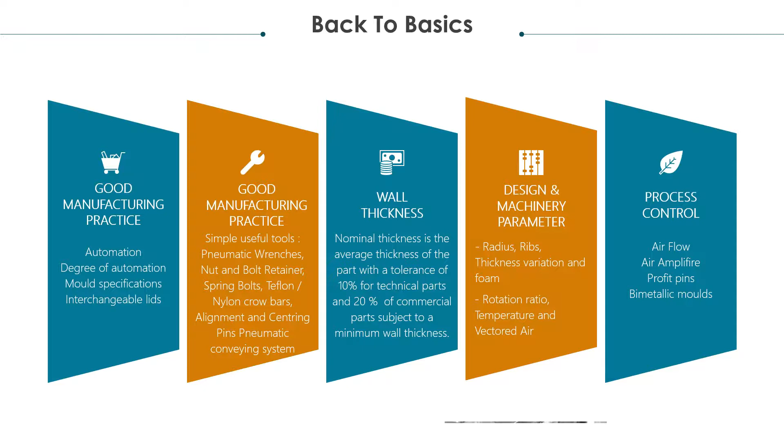Simple thing to look at is clamps on your molds. How many people still run with nuts and bolts and rattle guns, which make tremendous noises and throw out a lot of air? Sometimes they're dangerous to the workers' eyes. Can we not replace these nuts and bolts with clamps? Or to start with, the worker tells you, sir, the flange leaks and the flange is bent. So why not put partly nuts and bolts and partly clamps?

These are some different types of clamps. If you want to go to the next level of automation, you can always look at something like this, which Oliver has already shown us in his earlier video, ROMA. Now this is really a high-tech spider with some pneumatic clamps which work at a very high temperature. So this is going into very full high automation level.

So it's interesting where you can start and where you can enter, if you have the money, the output that is required for the number of molds that are going on. Spider hands work in seconds. Ordinary clamps will give you maybe a minute, but at least you're getting towards that level of output.

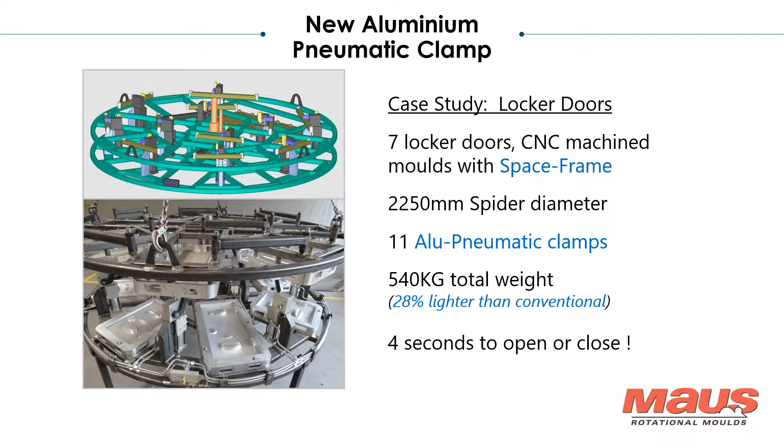Powder loading systems. Everybody's question today or problem is, why do I still need to load manually? Why do I still need the man to go up there and throw the powder into the mold, especially for people who make multi-layer products? Single, double, triple. I just got an inquiry for a machine for 6 layers. I really don't know why he wants 6 layers, but as a machine builder, it's our job to provide whatever they want. So if they want 6, 8, 10, we give it. But I think it's really crazy to do this.

People in the European world and the North American world, including Africa, have never heard of foam tanks. In the Middle East and in India, foam tanks are like every second factory or almost every factory would be producing a foam layer tank. So it depends region-wise what is the demand.

Powder loading systems, there are plenty of people now in the market, but most of them have specialized in conveying of powder in the PVC industry. In the rotomolding industry, there are very, very few people who are specialized. One of the top guys, I think, in loading is a company called Roto Loader in Canada. He has dedicated his entire powder loading system just for rotational molding. So that is somebody exceptional.

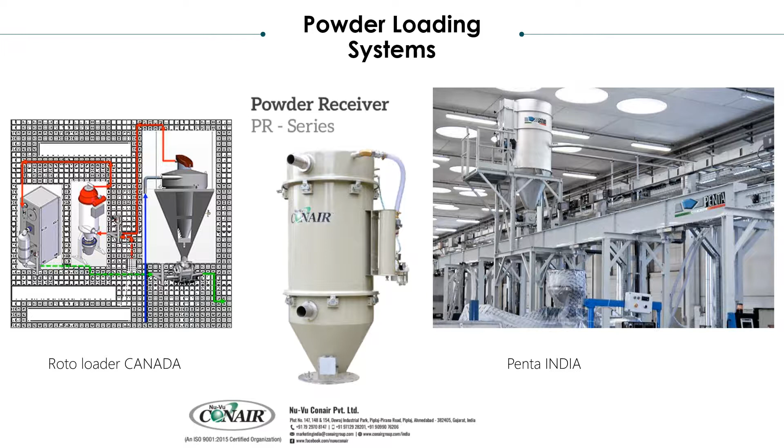Somebody should really try this out because it's not that expensive. We helped somebody on powder loading systems, and they wanted to put in very fancy silos made from stainless steel, which cost almost half the price of a machine. So we said, but you are a rotomolder, you can easily rotomold your own silos and connect them up. And that's how it was done, saving him a lot of money.

The other thing I see when I go into many factories is people trimming mostly with hand shavers, or with a hacksaw blade that's been sharpened, or even with old scissors. It's surprising, because today a simple tool like a router is available so easily, which can trim a 2-meter part in maybe just a few seconds.

So you can see how quickly it is. Routers are available off the shelf. They are quite safe to use, but they are very, very fast, so with just a little bit of guarding, you can easily do a lot of work with it.

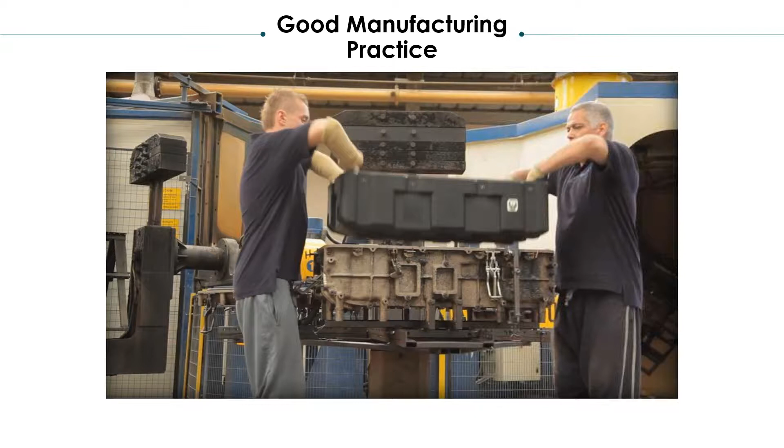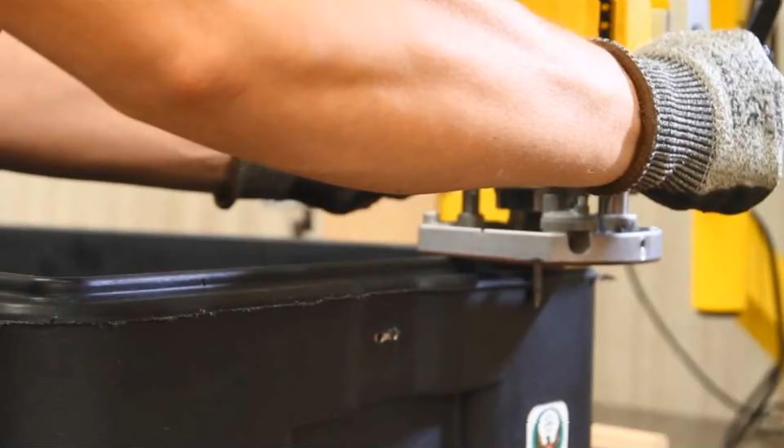Is the volume too loud? Can you guys hear me? No, there is no volume in this. There's no volume coming through? Is there no music coming through? No.

Okay, then let's just look at a silent movie.

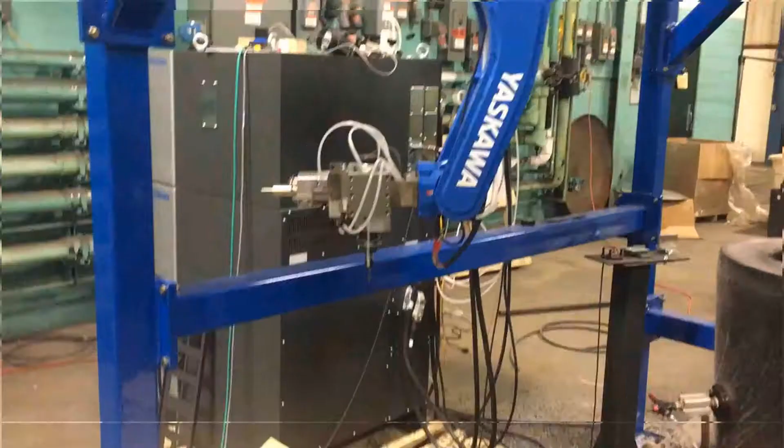If you go to the next level of routing, probably another step towards automation, you use a small little robot. This is a Kawasaki, Yaskawa. You can buy a Kawasaki, you can buy a Fanuc, you can buy a Kuka.

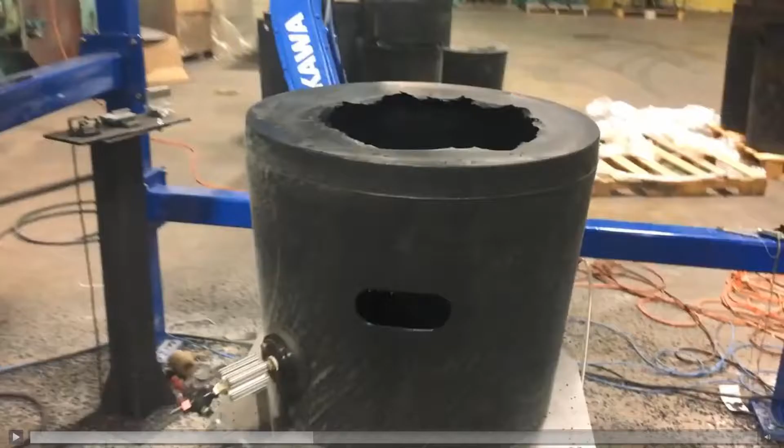The advantages of these routers are they are programmed properly. They do the same job again and again, and you don't have to depend so much on the worker, whether he trimmed a little less or a little more.

Can you guys hear me at all, or is even my voice not coming through? We can hear your voice, but there is no volume in the video. Oh, all right, fine, that's okay. You'll have to make do with me without the music.

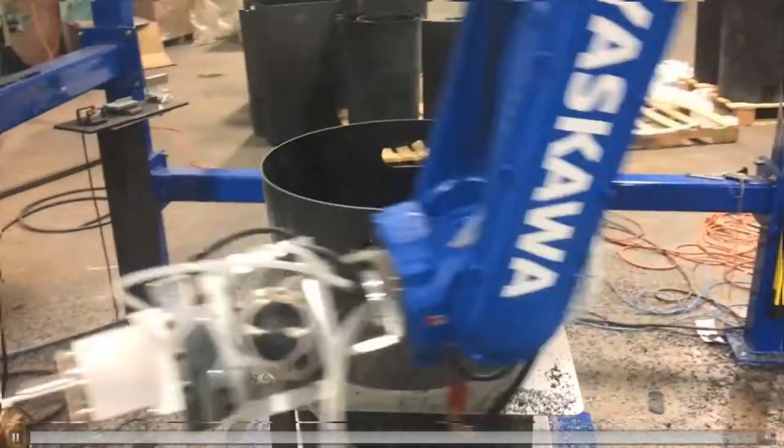No problem. So you can see how quickly this little robot, which is mounted from the top, not from the bottom, can do an excellent trimming job. You can buy today plenty of second-hand robots in the market. They're reconditioned and available very cheap, because a lot of automotive industries have shut down or changed their technology and got improved versions of robots.

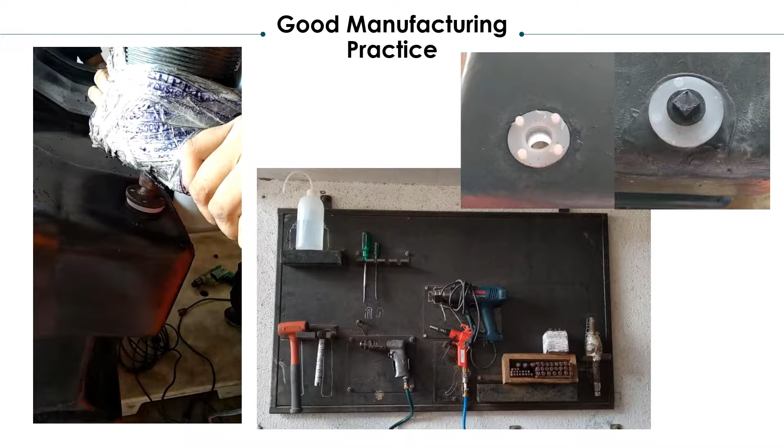If you look at this little video here, this is a spin welding process. Here there are spin welding fittings on top. One sec. These are spin welded fittings and the finish of that, and here you will see how the spin welding process is done.

This is again using a router. In a matter of a few seconds, you can put in female, male, any kind of fitting, which is bonded at high temperatures using friction. So basically what you need is a correct polymer fitting and a good routing gun, operating at maybe around 20,000 RPM minimum. As soon as it's molten, you just push a little bit and boom, it's done. The job is over. It takes about 5-6 seconds to do one fitting with this.

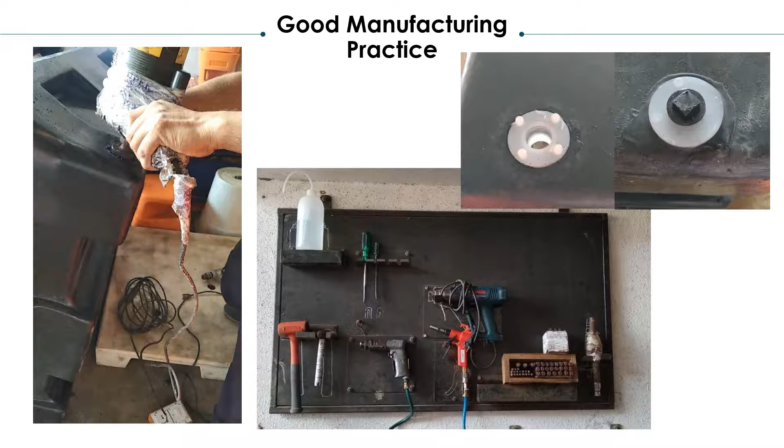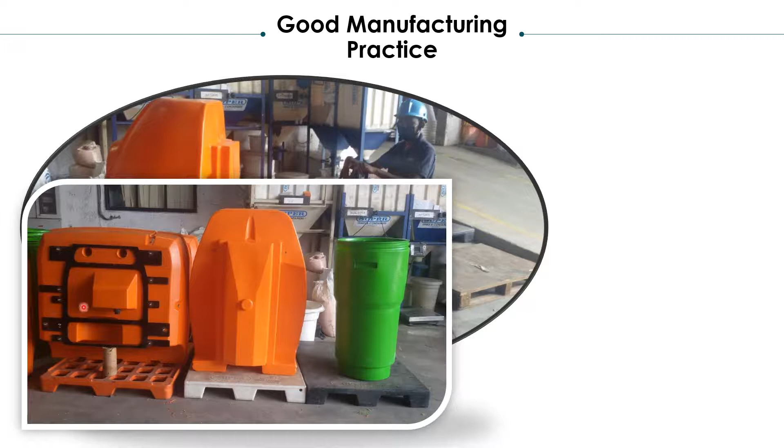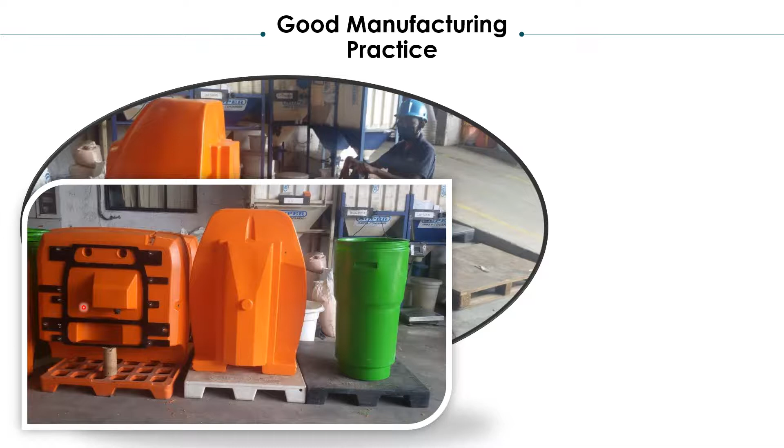Here are some examples, any pallet, second-hand, used, anything—even a fairly cleaned wooden pallet can be used to put the product on. Here you find this company putting a steel frame at the base of the part immediately as it comes out, while it cools for the next 6, 8, 10, sometimes even 12 hours, so that there's no deformation and the mounting subsequently on the vehicle is perfect. So just a small tip for someone to know.

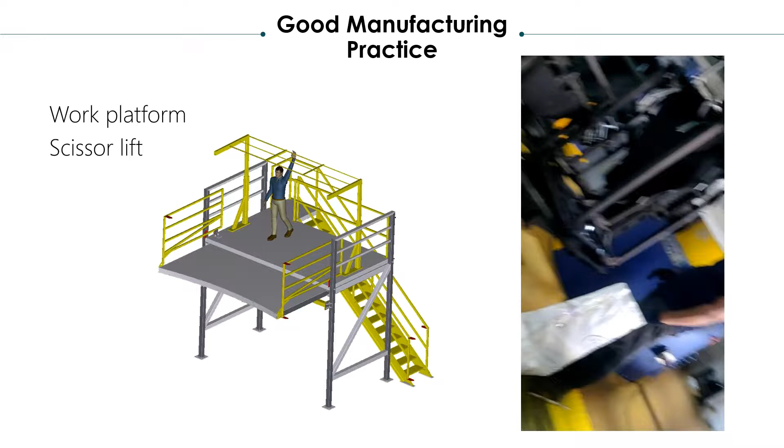Let us look at how many of our companies are using platforms. Always the problem is the fight for space. People think it's a waste of space, or you start life small in a small company and grow bigger and bigger, but you want to still do it in the same space. Which means the worker who has to manage the machine or load and unload the part tends to get more and more cramped, and your shop floor becomes a mess. If you plan a little better and give him a proper platform to get onto with proper guarding, the biggest advantage is you get better output from him. He gets less tired and has fewer rejections.

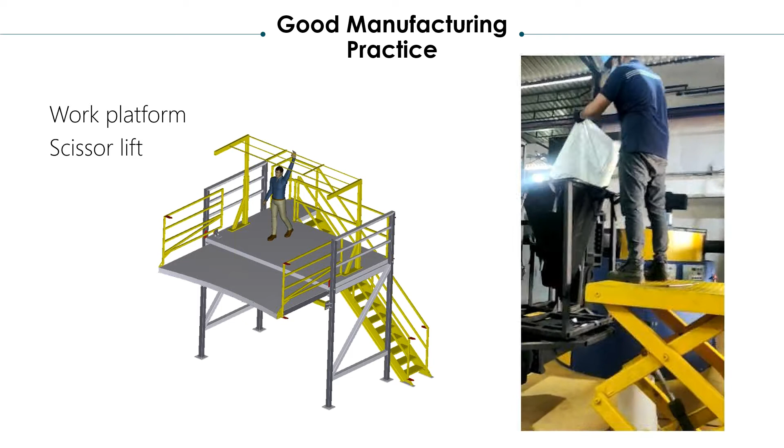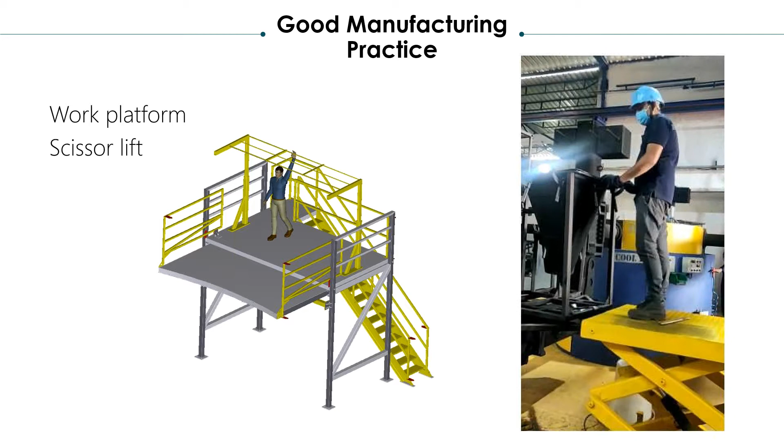Whatever we do in terms of automation, these two hands that we have, and sometimes the head, is definitely still the best option for loading and unloading, and perhaps the cheapest option. We are lucky in India, our labor costs are not that high. They will get high one day, but till such time, I think the best option is still a human being—a good worker who wears a proper helmet, wears gloves, and operates, and everything is good for him.

Let's get down to the biggest, most difficult question in rotomolding, which is wall thickness. Wall thickness is a function that has to be built into the part right from the design stage, right from the heating and airflow stages, right from the conductivity of the mold, whether it's steel or aluminum. Of course, radiuses, ribs, process control, and machinery parameters come into play at every stage of this.

Mind you, wall thickness in rotational molding is defined as minimum wall thickness. It doesn't mean if somebody specifies, say an automobile industry, that they want their tank to be 6 millimeters uniform—I don't think they would ever get that in the rotomolding process. The smoother the radiuses and corners, the less variation, but there will still be variation in wall thicknesses. So it is for us to use higher thicknesses on the radiuses and strengthen the product.

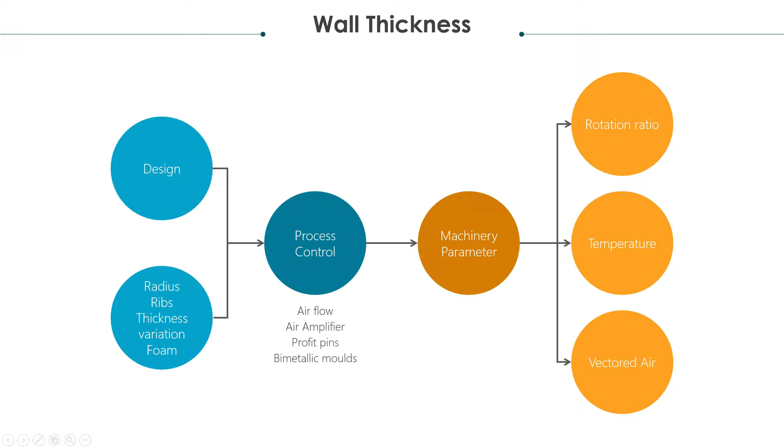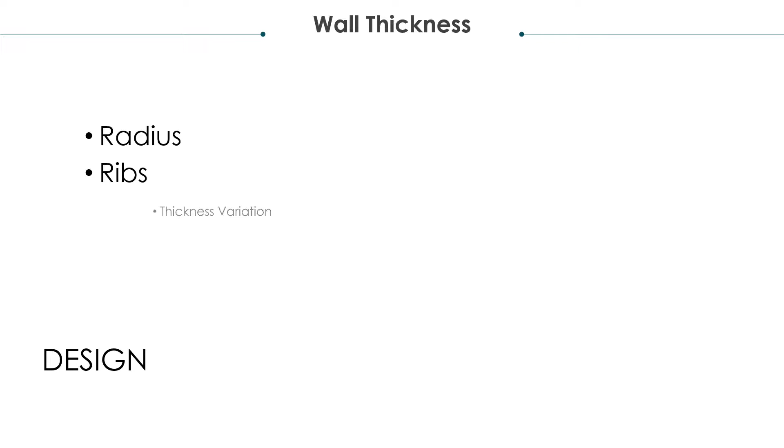Wall thickness by design is an extremely critical topic. You are looking at radius, ribs, thickness variation, foam, and things like that.

These are guidelines where kiss-offs are concerned, where you want higher thicknesses. You can also have kiss-offs called near kiss-offs, which are not really touching the top surface.

In the boat industry, near kiss-off is used a lot. Why? Because you want the hull of the boat to be slightly flexible. You don't want it to become like a rigid piece of steel, because when the boat is going fast and the water is pushing it, you want it to work like a shock absorber.

So you will create actually a gap instead of a real solid kiss-off. This is a near kiss-off by design.

Critical and important: what we've got here are simple thumb rules for kiss-off features. Normally, for 1 point of thickness of the final part, the gap should be 1.75 times that. The mold material, whether aluminum, steel, or stainless steel, doesn't really matter.

If you have foam built in, keep in mind the foam will expand and push the kiss-off all the way up, causing deformation on the top surface. This is PE foam, but the same thing can happen with PU foam later on. Therefore, when using PU foam, jigs and fixtures are extremely important.

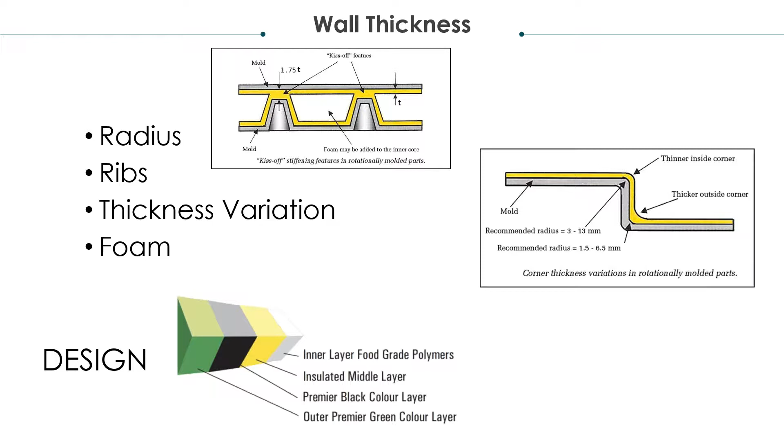Recommended radius for a 90-degree turn is 3 to 13 millimeters. But still, you will always find it thinner on the inside and thicker on the outside. You can look at this diagram and keep it in mind.

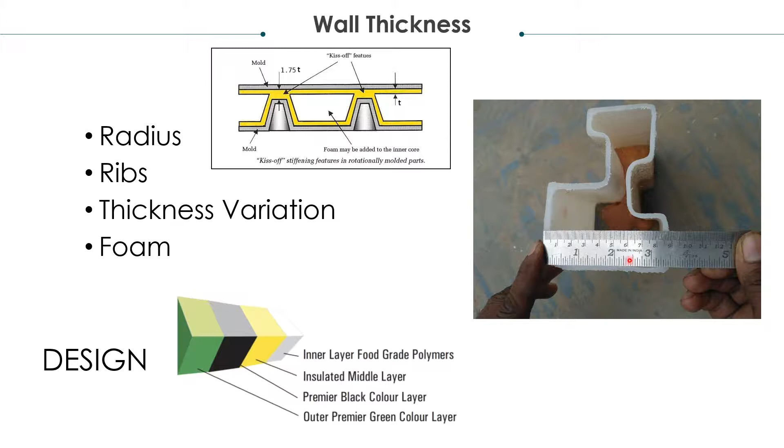That's why I call this presentation back to school. Most of us forget these things when we design products today, or when somebody comes to us with a steel part and says, I want to make this into plastic. There is a difference between plastic and steel - the way the material flows will be totally different compared to steel. So we have to make him understand that.

Look at the variation here - this is an excellent part because of this thickness change in this area. Let me explain this: this is being done by design, and this slight thinning that you see is also by design on the other side. So this is actually a very, very well designed product.

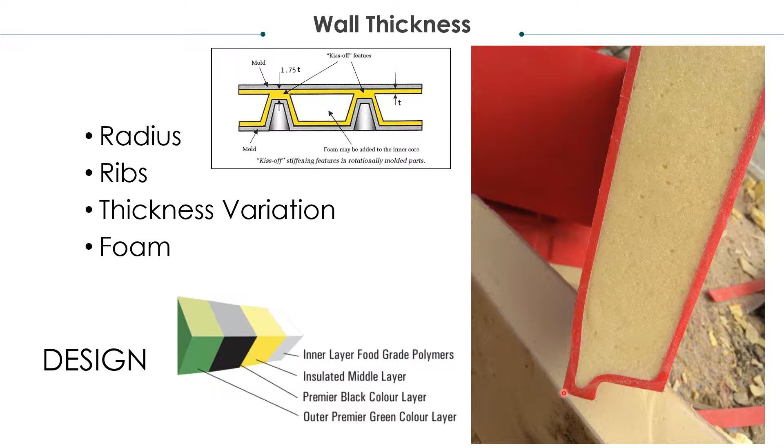Look at this - perfect parts for special projects, with perfect thicknesses on the edges to give it strength, because those are load bearing. This is PU foam, but look at the wall thickness here.

This cannot be helped because this lip will always catch more powder during rotation, whatever you do. So you will get a slightly higher thickness than this, but you can use it to your advantage.

Here, this is PE foam, using it for kiss-off. This is a very, very deep cone, as you can see.

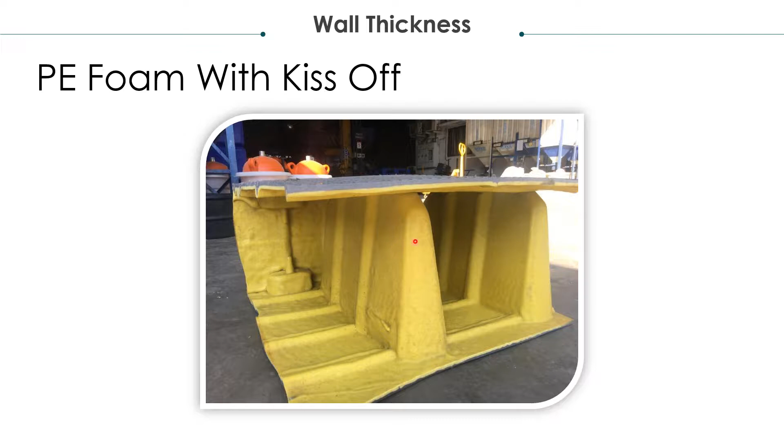This is being built in many parts of the world on our machines. It's basically a cross section of a floating jetty which can take a very heavy load. The beauty is that this entire cone formation inside is just being manufactured on a normal machine - there is no additional heat amplifier, nothing here to help it.

But the trick is in getting the airflow in the right places and in heating the inner cores the way they should be, without much help compared to the other parts of the part. So you get a very uniform thickness here and here. The difference is really very small - we are talking about 1.5 millimeters, which is remarkable.

Some of this data, slides, and conclusions that we have learned or come to are derived by world-renowned experts. I think the first name that would crop to anybody's mind is Professor Roy Crawford, because he has really been like a father of rotational molding. He taught us over the years, and unfortunately it was a big loss when he passed away, to the industry and to the process.

He put us on the world map, whether it was North America, New Zealand, Africa, or anywhere. Professor Roy Crawford became a professor, I think, at Queen's University of Belfast, where most of the names that you see have graduated from.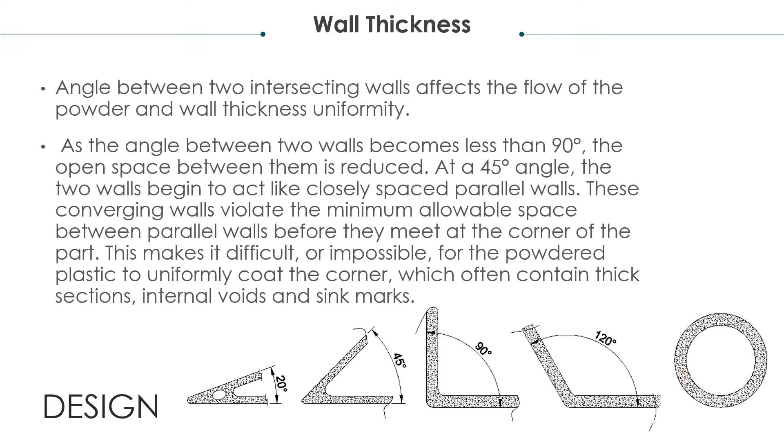So these are guidelines that all these learned people taught us and what to do. If you go to 45 degrees over here, you will find that you get a more solid rib, but not as deep or as long as you would want for your design. Because today when you do FEA, this solid rib on the drawing will give you tremendous strength. This will give you lesser strength.

When you get to 90 degrees, you tend to come closer and closer towards uniform wall thickness. Even then the radius here, when you look at the cross section, you will have a thicker layer there. If you go to 120 degrees, this is what happens. What makes a perfectly uniform wall thickness? Obviously the round circle, because our process rotates biaxially.

Ribs and thickness variation. Again, explaining to you how a rib design is the starting point of a rib design. Basically, if T is the thickness of the wall and you want to create a rib, you should not go more than 4T. If you go more than 4T, all you'll be doing is creating a well where the plastic will get entrapped. What should be the gap? It should be 5 times the thickness. This would be an ideal rib.

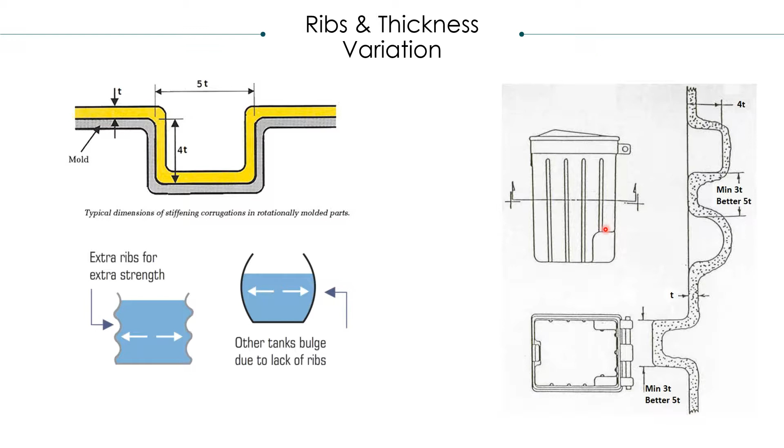If you made a tank and you made a tank without any ribs - in Australia, mind you, there are many tanks without ribs, but the strength of the polymers is higher and their height to diameter ratios are different. The domes are different. Therefore, they do withstand even 10, 20,000 liter tanks. But when you go for lighter sections than that, ribs will give you additional strength on the side. So this is something that you keep in mind.

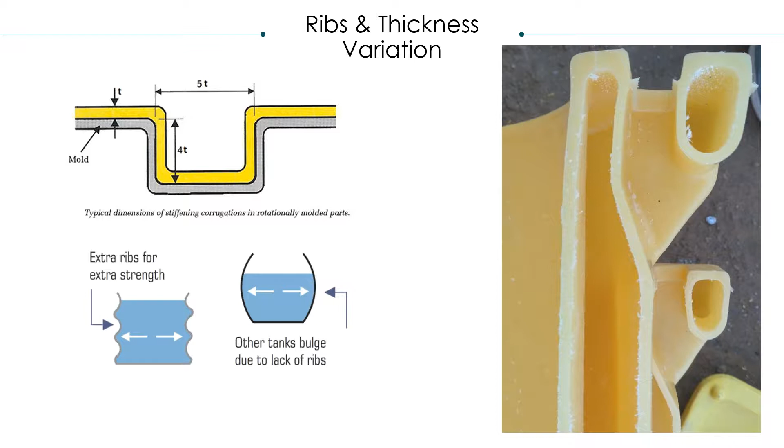Look at this section, compliments of my good friend Shwetang. This is produced in Constacool, a very complex part used in the refrigeration industry. Look at the thickness he could get on his machine with a lovely mold, and a very difficult molding to do. But I think every time it comes out perfect.

FEA analysis - all standards today of any credibility, all big companies are going to eventually ask you for FEA analysis of the tank you've manufactured and given them. How can you tell me that an 8 millimeter wall thickness is enough for my tank? Because he's going to be storing not only water, he could be storing hydrochloric acid, nitric acid. He could be exploring - yesterday somebody was talking to me for guidance on sulfuric acid and phosphoric acids. He really wants to be sure, because today if there's an accident, a leak with acid, my God, your factory is as good as shut down.

You have to forget it. So one really has to be careful where you give your tanks to, and what are the parameters that he cannot go beyond. Normally people tell you it's going to be ambient temperature, never going over 40, 45 degrees. But sometimes when you're working with chemicals and acid and you find the tank has deformed from the top or side, you go there and measure it with a simple temperature gun, and you find the service temperature has been 80 degrees. Obviously LLDPE will soften at 80, so that's where PP applications will come in.

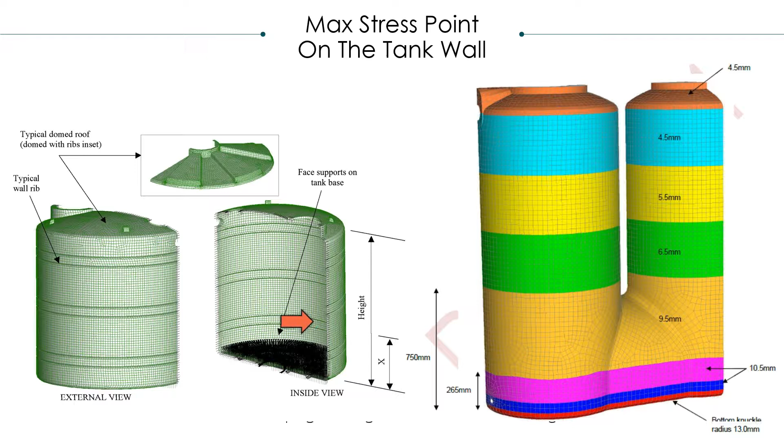1/3 from the bottom is always where your hydrostatic pressure is the highest. What do we tend to do as novice tank manufacturers? We kick the tank on the side, touch it here, and the dealer says, 'Look how strong this is, nothing's going to happen to this tank.' He may have missed the point where actually the wall is thinning. That's one of the biggest issues with blow molded tanks, because you always have thinning towards the bottom and thickening towards the top, since the parison comes from top to bottom by gravity. I'm not going to go into that now, but this is what it is.

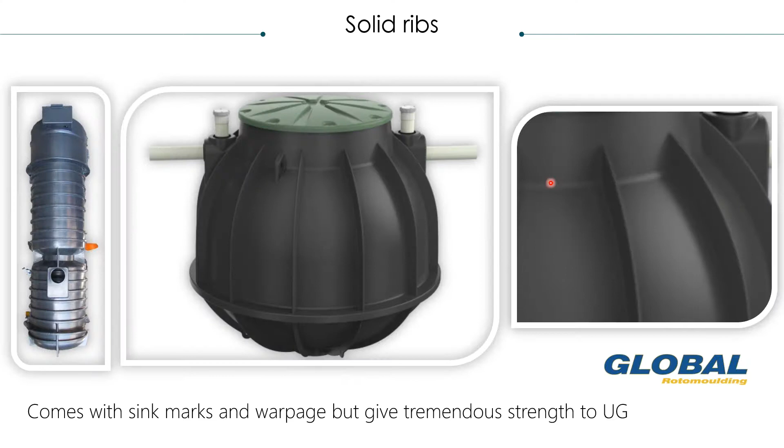So 1/3 down there, really be alert. The bottom is normally fully supported, not much of an issue. The top, because the plumber is going to walk on top, needs to be strong and stable enough to take his weight. There are many standards now coming up, ISI and very heavy tanks - sometimes I think over-designed, but okay.

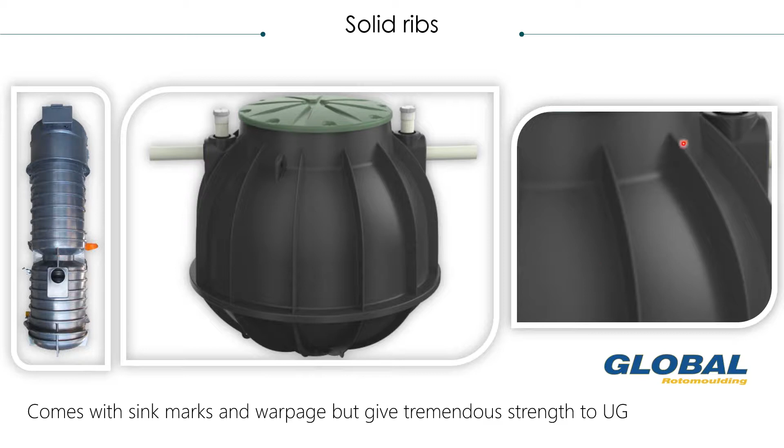This is some underground products. This is the kind of rib I was talking about earlier, which forms a solid deep rib - about 125 millimeters on top here and about 60 millimeters down here. You can imagine creating a product like this without a single fault, with really solid ribs. This can take a lot of earth pressure - even a truck can go over it and you won't have a problem.

It's a septic tank - this is a pumping station in Latvia. No, this was in Norway. Mold made by us, again one of our customers. It also has solid ribs in it. Very, very good product - this shows more detail. This is in Australia, global.

Sometimes you do get some sink marks because the plastic is very thick here and takes the longest to cool. And if you look at warpage, you may also have slight issues, but if the product is going underground, there's no need to reject it straight away.

Process controls - again, a parameter that everybody tends to ignore and either blame the operator or blame the machine. So it's always easier to put the ball on somebody else's court, especially when you get a rejected part.

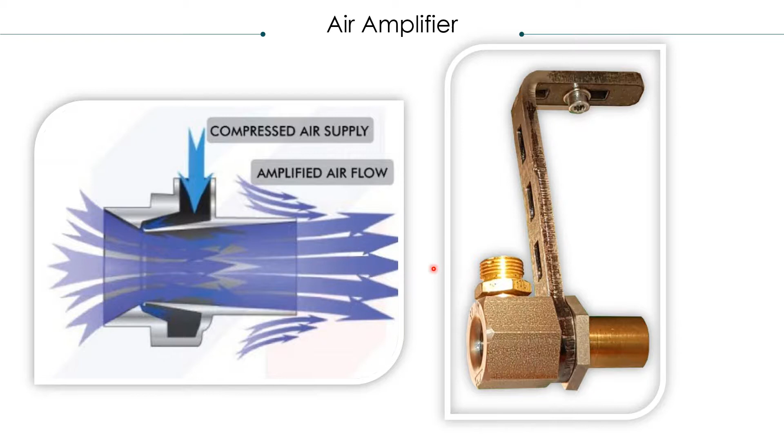What is an air amplifier? An air amplifier is something that takes a little bit of compressed air, throws it into a venturi, and sucks a huge amount of air from the other side. So a little compressed air comes in, goes through a small slit, flowing very fast out. Because it's creating a huge amount of negative pressure, it sucks nice hot air from the oven and throws it into a deep cavity mold or part of the mold where hot air cannot reach. It not only takes hot air from here, but also, because of this high-speed air coming out, sucks more air from other parts of the oven and pushes it towards the part, getting a nice thicker wall where earlier you had a paper thin wall.

Again, very useful for double-walled deep cavity containers.

This is something that has come up in rotational molding in the last maximum of 5 years, not earlier. This is a partly vacuum heat pipe, which has got a little bit of water in it, a special wick. Half of it sticks out in the oven of the mold, and it conducts the heat very, very quickly.

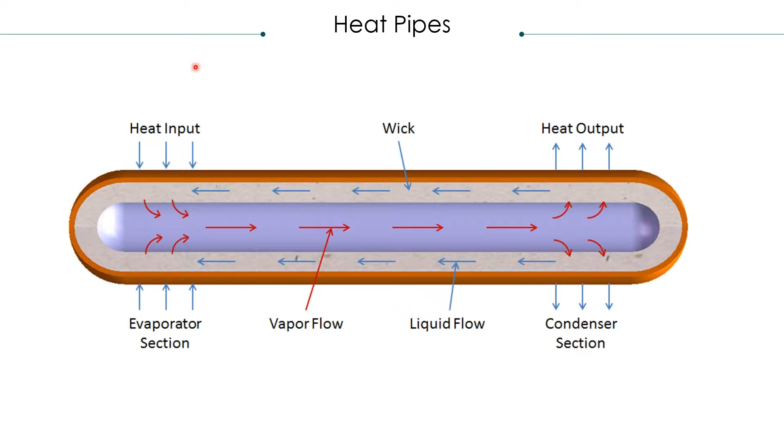If you have been to different exhibitions, you will find that people are selling a lot of heat pipes. Maus is one of the leaders in it, but now there are many more manufacturers. They will take a coffee cup and put a heat pipe into it, and in less than a second, the other tip of the heat pipe will be so hot you won't be able to touch it. That is how they create a through hole in a part, which you think is almost impossible to rotomold.

Where is there any maintenance on a heat pipe? It's a completely sealed unit. It's partly vacuum, it's got a wick, it's got a little bit of water in it, and it is high conductivity material on all sides.

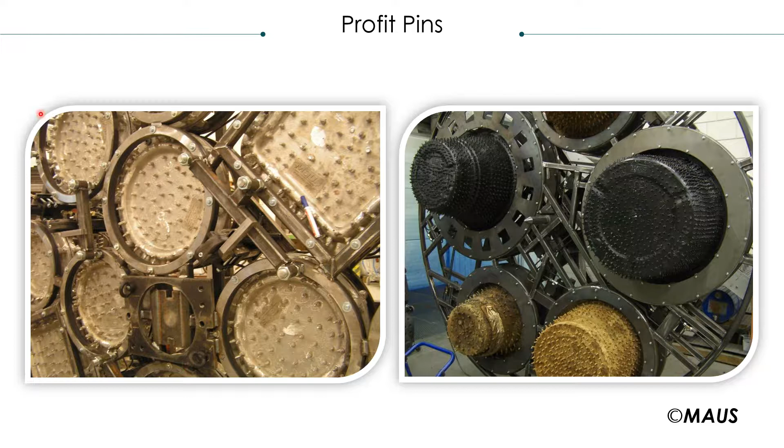Profit pins, again a Maus invention. Basically, heat conduction takes place with surface area and delta T, the difference in temperatures of air and the mold. So if you give it more surface area, the mold has the opportunity to catch more heat. So when you are trying to make a very, very thin wall product, like this planter mold, where the wall thickness may not be more than 2.5 to 3 millimeters, how do you get it?

Otherwise the part will burn if you try to work it. The steel or aluminum to polymer ratio is ridiculous - you're talking of perhaps 20 kilos of metal and 2 kilos of powder, or even sometimes half a kilo of powder with 10 kilos of metal. So in order to get the heat uniformly distributed all around the mold before the powder melts, they create these pins on top of the mold. It's a cast aluminum mold, and that way they give you additional surface area for heat transfer.

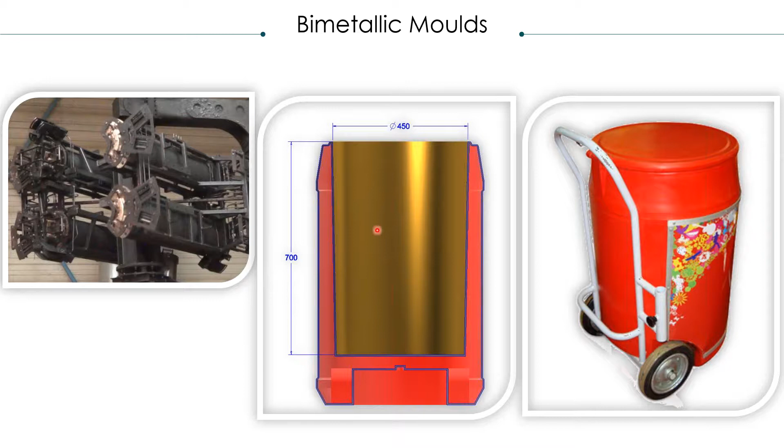Bimetallic molds, again something not commonly used in India - when you have a deep cavity double walled part, why not make the inner cavity using brass or copper sheet? I can assure you the thickness here and outside will be almost the same, and you don't need to spend any extra time in the oven. The conduction is much, much faster and easier.

This is parts of a mobile toilet, being built in Turkey on our machine by Jalal Basil, from whom I learned a lot about bimetallic molds. He uses brass pins, brass ends and things like that on these molds, and the parts were coming out perfect, zero rejection. Earlier, if you made 10 parts on this, at least 2 would be rejects because it would not form properly at these ends, since you need a higher thickness there where the pins are located.

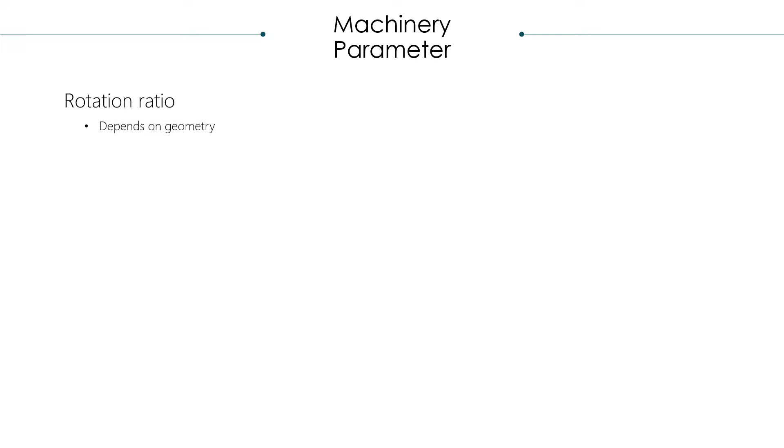Machinery parameters: rotation ratios, vectored air and temperature. This is our strength, I suppose, but still.

The guideline on process rotation ratio only depends on telling the operator, or you do it by your experience and it will come out okay. But why? Because you really have nothing as a guideline to tell him how to go about this. You have not been an operator all your life.

Next is, how is he mounting the mold? If it's a vertical part, a vertical cylinder, is he mounting it vertically or horizontally? Depending on the swing, what does he have? Is a 4:1 ratio uniform, perfect for everybody?

Well, all the pundits, all the gurus taught us that 4:1 is probably the best starting point. I'm sure years of work at the Queen's University of Belfast, and probably in somebody's kitchen, went into coming to these ratios.

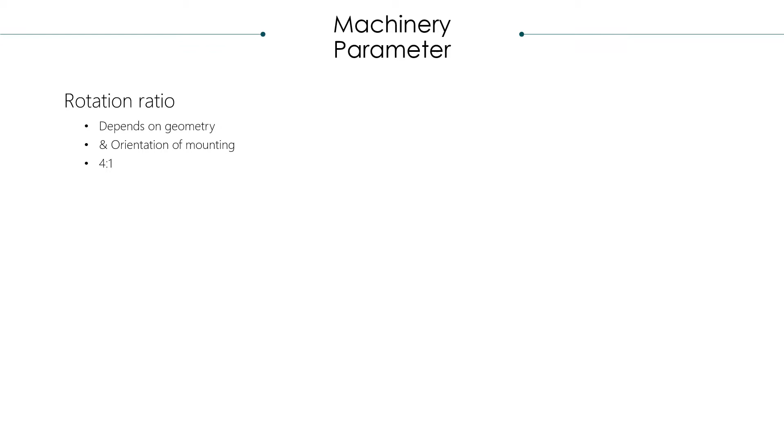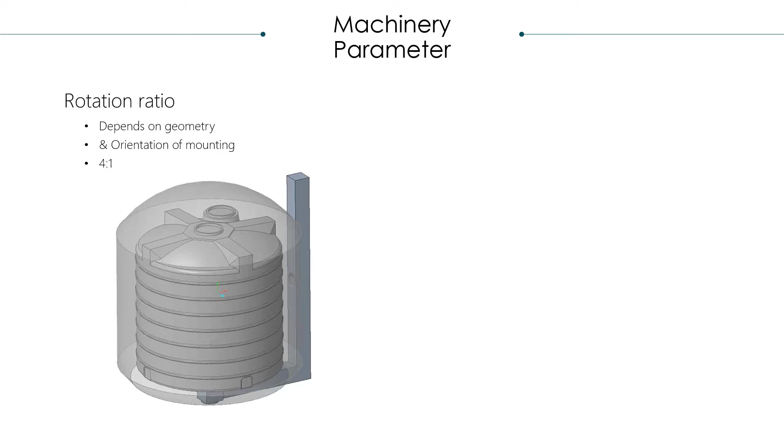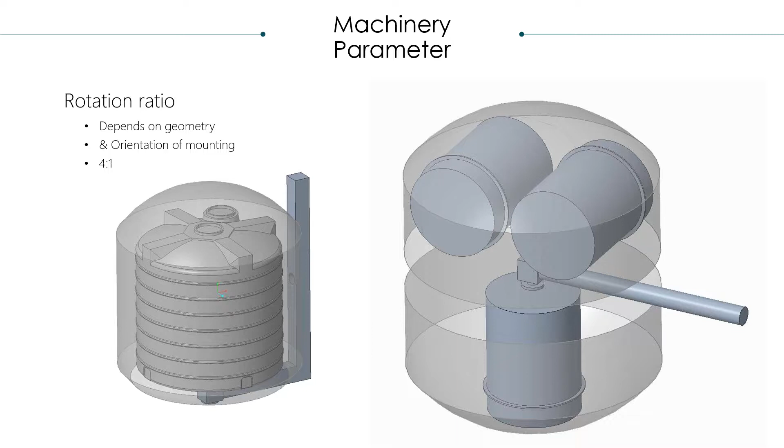I don't know how many of you know that rotational molding had started in the chocolate factory. The first rotomolding machine was probably made when you make Easter eggs, where chocolate was poured in two halves of a vessel, put together, and rotated on a simple stove, on a simple heater. Then somebody thought, why not use polymer granule in this and mold something hollow? He tried granules and said this is taking too long and it's not uniform, so why not go to powders? And that's how the story of rotomolding started.

This is a standard, and this would work beautifully with a 4:1 ratio, no problem. But if you've told the operator, I have only got a straight arm free and I want you to make this, I don't care how, I want my production, I have an order, I need 3 of these manufactured at one time, do it somehow - do you think he can do this? No, it's crazy. If he does that, you'll have all 3 parts rejected.

Now, if you find that with that your thicknesses are not coming at the right place - I'm talking of a simple vertical tank - it could be that your airflow is not right. It could be that the base and the mounting flange gap is not enough, or it could be that you are punching in a 4:1 ratio in the machine, but actually when you measure it, the machine is giving you maybe 3:2 or something like that. So you have to really keep an eye on this.

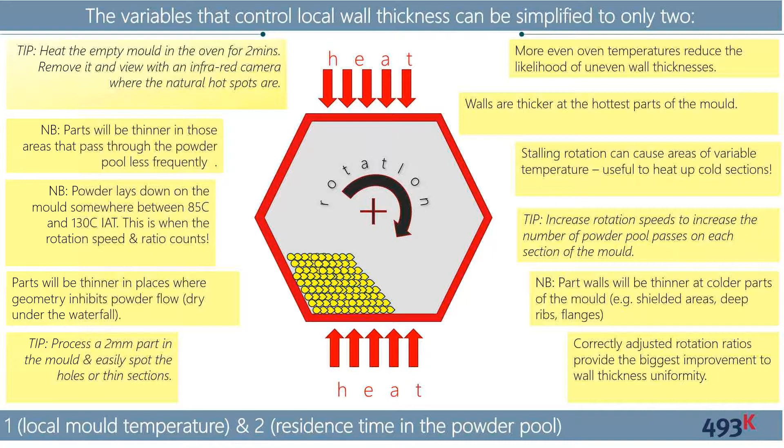Once you have set your parameters right, increase the wall thickness, increase the shot weight, and run it for the right time, and you'll get a perfect part. From day one, from the beginning, you won't be wasting kilos of material, and nobody will be there to tell you why you produced 10 parts and then realized you're not getting enough thickness in this position. So keep that in mind.

This is a very important slide. Compliments to Dr. Garrett and that from 493K.

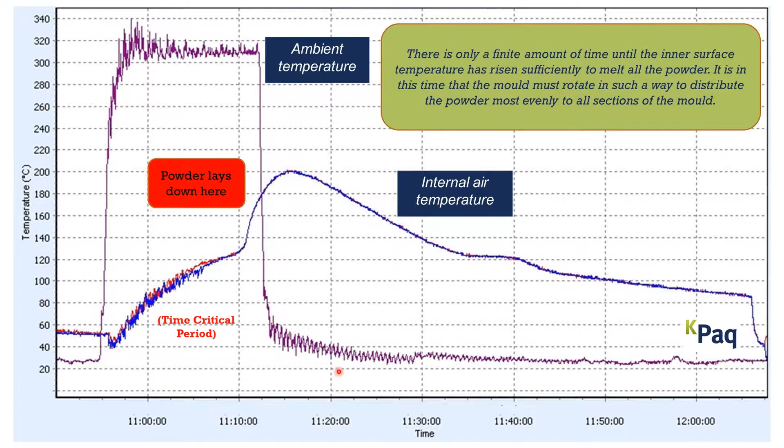Once the part leaves the side wall, the metallic wall of the mold, you've created a gap between the part and the steel, so you've created insulation there. The rate of cooling becomes thinner and you're only cooling from the outside. If you're using internal cooling, you will get your 10 degrees or 8 degrees a minute, and your part will come out without warpage, without any problems, perfectly cured.

It's advisable not to start cooling the minute the part comes out. Give it 1 or 2 or 3 minutes because you don't need to really cure the entire part in the oven. You can save some oven time by getting to this peak just outside the oven. Can you see here? Like that.

Vectored airflow, or air where you need it in the machine. Most machines measure the temperature of air in some corner of the machine, maybe at the top, at the side. You put in 2 probes here and everything, and you can measure the air over here.

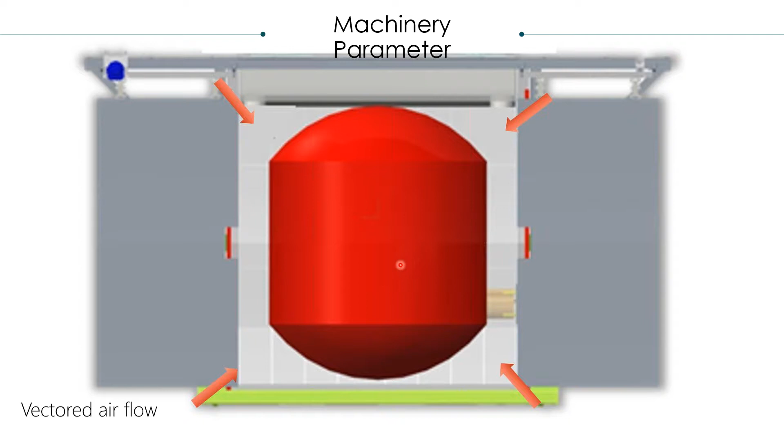Is there a mold sitting here? It's very easy to put a probe here because it's easy to maintain and easy to check if there's anything wrong with it. But there is no mold here. There is no mold here. That's where PIT equipment comes into play.

But you can also design the airflow in such a way that it hits only the mold and not the side walls of an oven. You don't want to heat up your side walls, they'll eventually get hot over a period of time. What you really need is air where you have polymer, not air to heat the steel.

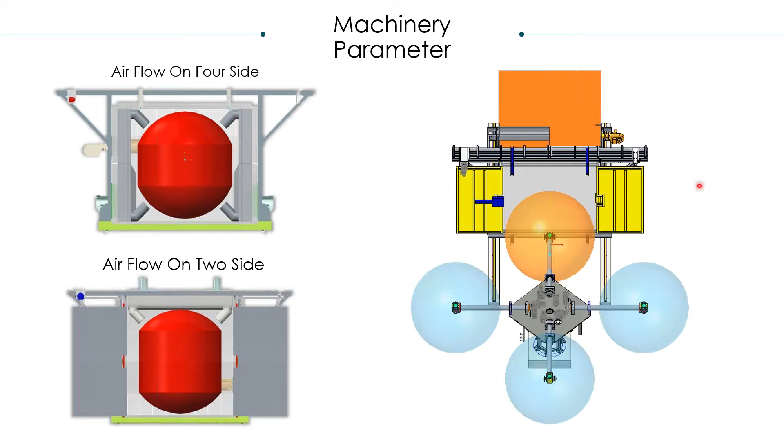This is airflow on all 4 sides. This is airflow on two sides. This is a typical fast machine design, which has the advantages of an independent arm machine being totally flexible. You can run it, though it's a fixed arm machine, it has the advantage of an independent arm machine and the advantage of a fixed arm machine, the speed of a fixed arm machine.

The reason this is there is because the machine can travel in any direction. The machine can load, unload at any point. There's a traveling oven, very easy for multi-shots. We think this is probably one of the best ideas that has come to us and is running very well all over the world. We have more than, I think, 350 of these machines running in the world.

Safety is an issue which is totally disregarded in most MSMEs or small scale industries or companies which are far away from the eyes of the factory inspector or from the eyes of factory management. As long as you get your pillows out, nobody cares what is happening.

Today, safety priority has become our friend here with a mask. We also need glasses. So these two are really important, in addition to what we do on the floor.

In rotomolding, ideally speaking, for an outside person, the best method would be to put fencing along this red line everywhere, put a few gates, and this is the safest machine in the world because nobody can go in there when parts are rotating, nothing can happen, so he's fine. But can we really run rotomolding machines with so much fencing and guarding?

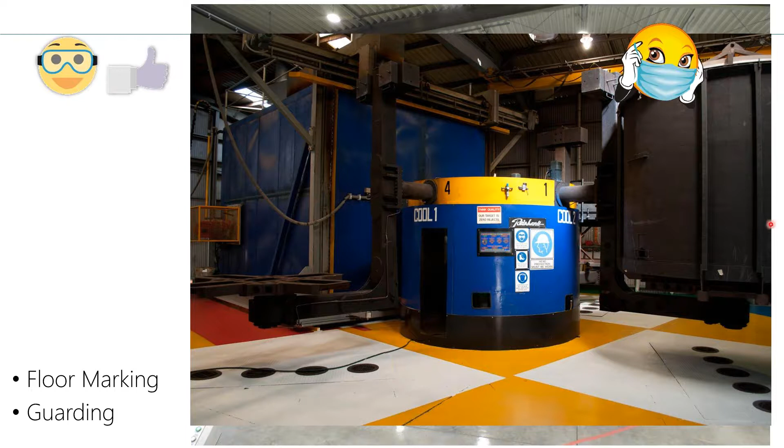All the machines marked with CE going into Europe, America, Australia - this is absolutely compulsory. Maybe not today, maybe 5 years down the line, it is coming to India, there's no doubt about it. And if you're working with a multinational or a custom molder for the automotive industry, sooner or later they are going to insist on all the additional safeties required on a machine. The basic safety that doesn't cost money and that each person can do immediately in your own company is marking the floor clearly - which areas are safe, which areas are not safe for someone to walk around.

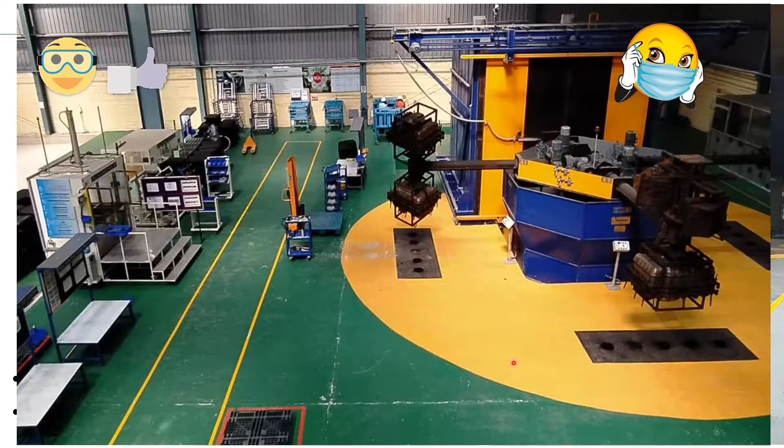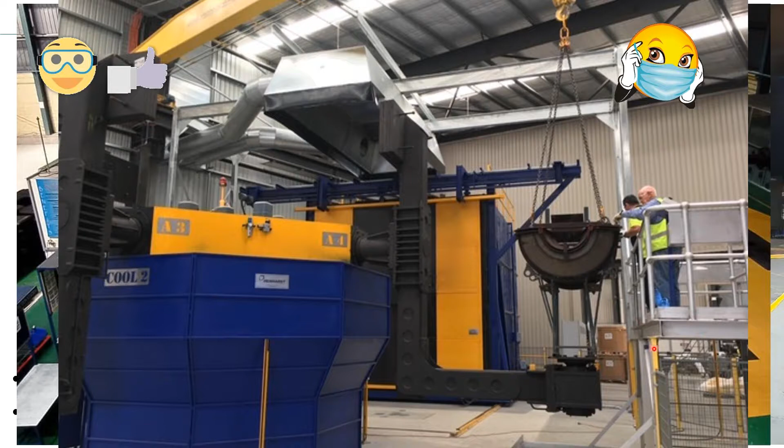It's really critical. This is a company in Africa, Top Tank, in Kenya. They have 3 machines in a line and they have adapted very well to floor marking and safety standards, and they've not had a single accident or crash, or somebody leaving a ladder in between, or a pallet truck, or a bag of material when the machines are moving. And the brighter the floor, the easier it is for the operators to work in.

This is a factory some of you may know, in northeast India. I'm very proud to see it, because they followed each and every instruction we guided them with. But the outcome was even better than what we had guided them. So hats off to them. It's running 24/7 for the automotive industry.

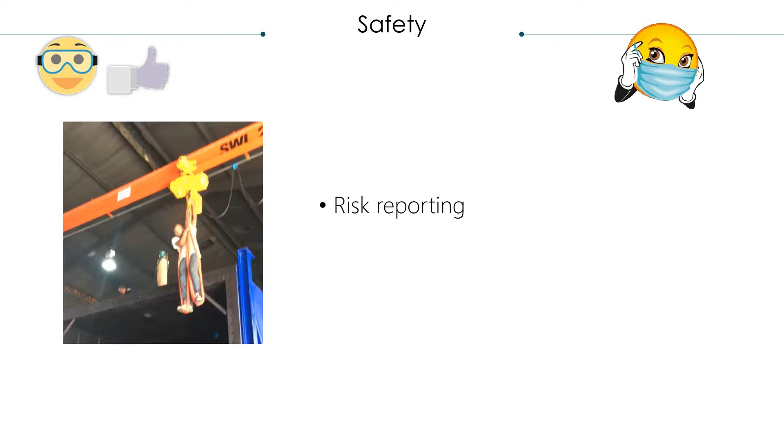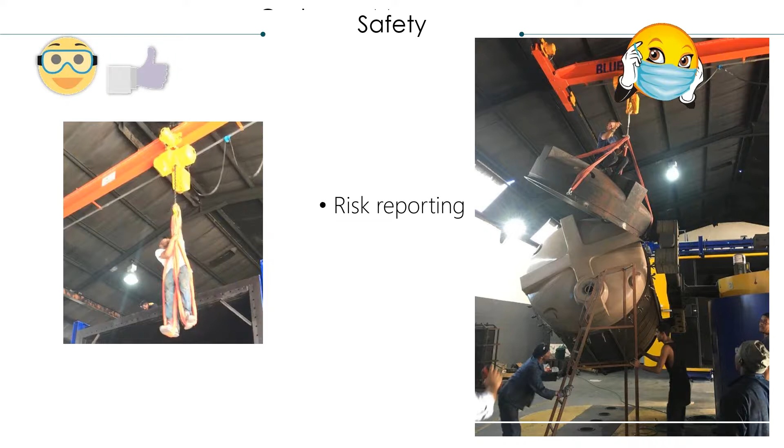Risk reporting is a critical part of safety, and it actually helps you prevent an accident. So why wait for an accident to take place before correcting our method of working? Ideally the method would be to report a risk - listen, you're running a high risk, and if you run a high risk, please, we should not do this again. We should find the right height of ladders, or have a forklift with a cage to go up there and do the right thing.

There are people who ignore everything - qualified, educated, experienced people - but they also sometimes consider that they are acrobats. I said, so what, we can do it, we've done it many times. And it works, till the guy falls and breaks his hand. It works.

Customer management and service is another basic tool everybody has to understand. The minute you walk into anybody's company - whether to sell a machine, install a machine, give him a roto-molded part, or just service something you've given - you have to know that you are one team. You've entered his gate, you and he; he's not the customer and you are no more the supplier, whatever his attitude may be. Keep in mind that you are going to get into his shoes and think: what is his problem? How can I help him? What does he really want to do with my equipment, with my roto-molded part? Can I improve or guide him very gently? Egos are very big sometimes, be careful. And if you guide him the right way, you will never come out empty-handed. You will always be a winner.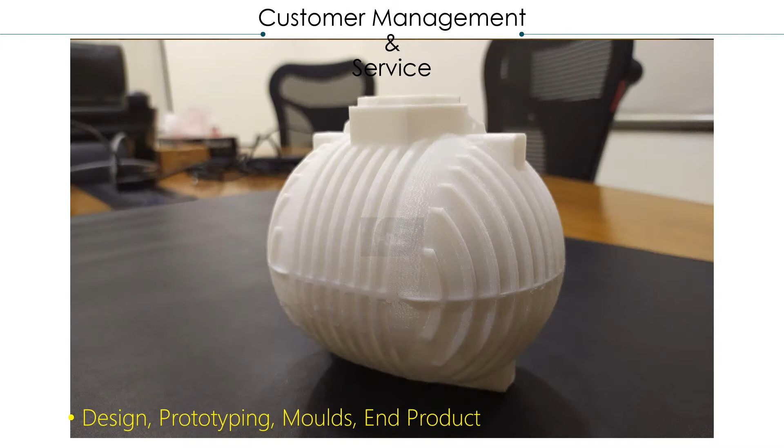Service - when you say customer service, at what point and how much do you do for a customer? I think any amount you do for a customer is sometimes not enough. There are some very difficult customers, but how do you convince them? Good proper in-house designing, or referring him to the right designer. Like we have a very good designer amongst us, Satish Kople of Design Directions, they do some fantastic designing. Or asking the customer with a lot of experience for his sketch, his design, and from that making a proper drawing and giving it to him, subsequently 3D modeling his part. You're bound to get the order.

Making an excellent mold is not enough. From the mold, you have to give the tank as well. When we talk of servicing, 24/7 support has to be in real time. When somebody calls you in the middle of the night, don't say it's the wrong time - ask if it's urgent, and get up and sit on a computer and solve it. Keep in mind, for him it may be morning 8 o'clock, or it may be the middle of his shift and he has parts to deliver the next day. So you must help him out.

We had a very experienced molder who has had our machine for 14 years in Australia. He actually woke me up at 5 a.m. 3-4 days ago. I said, yeah, what happened? And he says, the burner has stopped firing, I've got a big issue, I don't know what to do, I have to deliver this tank today evening and I'm really stuck, I'm sorry to wake you up. I said, don't worry, let's see what we can do.

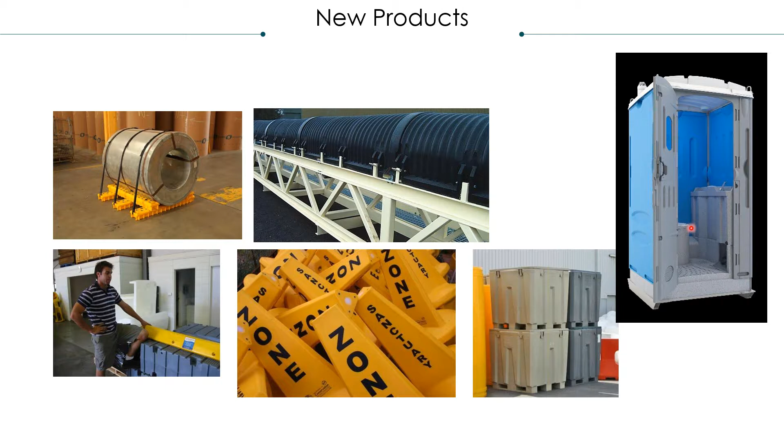This is a conveyor cover used in the mining industry. Again, very popular in all modern mines or upgraded mines because they cannot allow expensive ore losses or water contamination from rain.

Everybody likes to think out of the box, or should be thinking out of the box. Where are we in thinking out of the box? I think we are far away. Even though we are very experienced rotomolders, I think we are far away from it. Look at this.

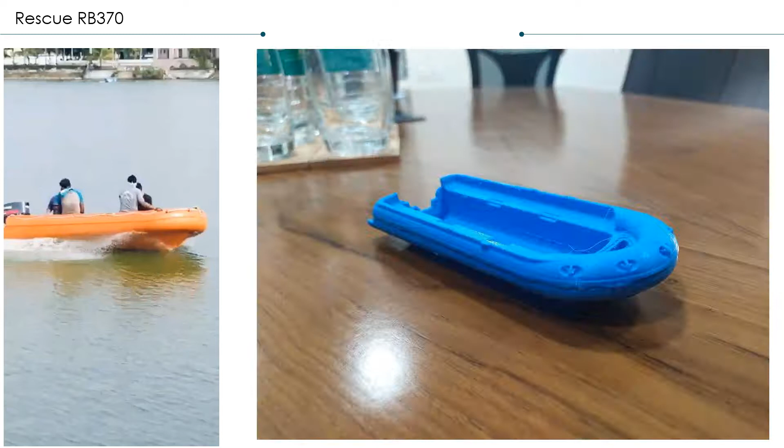It gave us an idea of what the demand, or rather what we should do for the society to try to help them in this kind of situation. So we started our project on a rescue boat, from a 3D model to a mold to the product. And we have today the product, which is a 3.7 meter boat, which can carry 8 people comfortably.

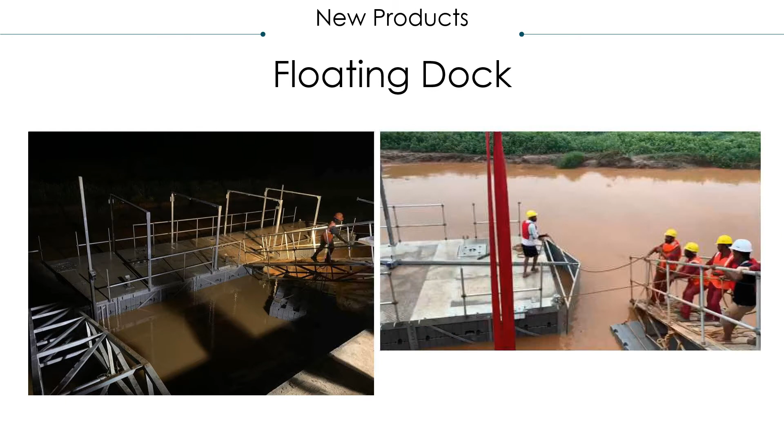So this year, when we had the floods again, we were ready to deliver everything that was required to the emergency services, disaster management services.

Look what rotomolding can do, how and where you can apply it. It's really interesting. This is a floating dock in the middle of nowhere, where to work you require guards with AK-47s around you. Yet these people have done an excellent job. Big float. It's almost on the border of Congo. There's some interesting parts here.

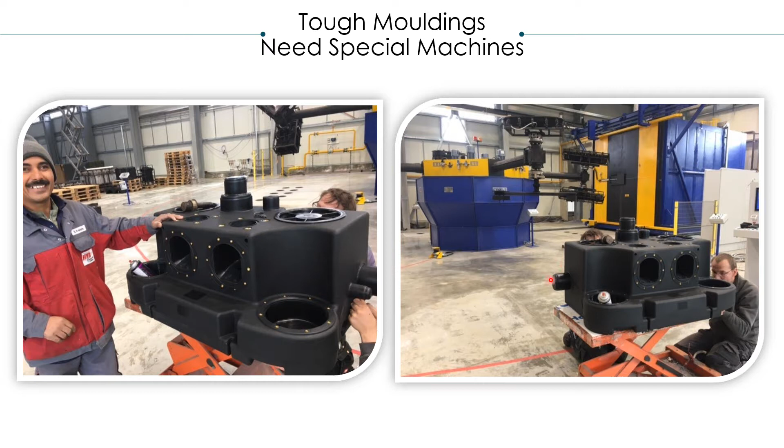This is a very, very challenging job on a machine in Germany. I was personally there to install and commission this machine, and it had 32 inserts in it, with a duct to be molded in plastic running from inside up here. There's another duct coming from here, also down here, forming a Y section, and it has to form inside the mold. It was a nightmare - that was the first mold he brought to us and said he needed to produce this. Until then, he had never even spoken about this. I said, my God, this is really going to be a tough job. Anyway, eventually on the second shot, we got it right, and it's good.

We love our country. We must keep moving even in difficult times. And I would like to say a big thank you to ROMA and end this presentation on this note. You are welcome to come up with questions if there are any. Don't make it difficult for me, I may not be able to answer them. Thank you.

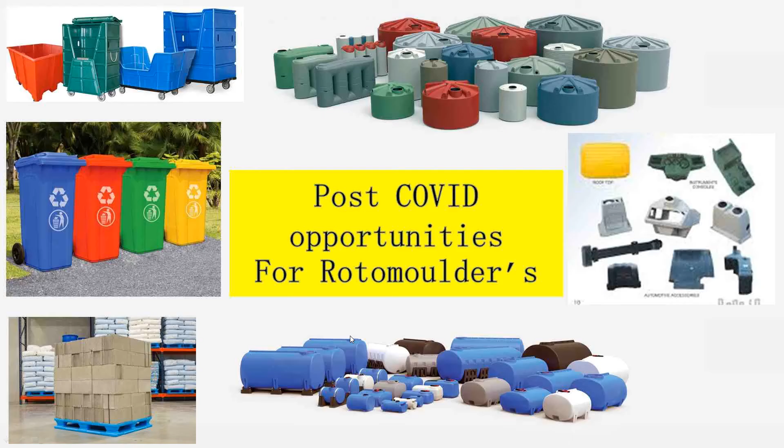Now this year we are working on skill development. I am going to put up this one slide.

This year our target is skill development for the manpower used in our rotomolding industry. The PM's message emphasizes skill development. So we are working with the Council of Skill Development, and in this context, Mr. Vinod from Reliance Industries is supporting us to work with the Government of India. This year we have more emphasis on skill development of our people. We will come out with our proposals very soon with the skill development people. We'll call directors from the skill development organization, they will come and give a presentation, and ROMA and the skill development department will work together for the betterment of the rotomolding industry in India.